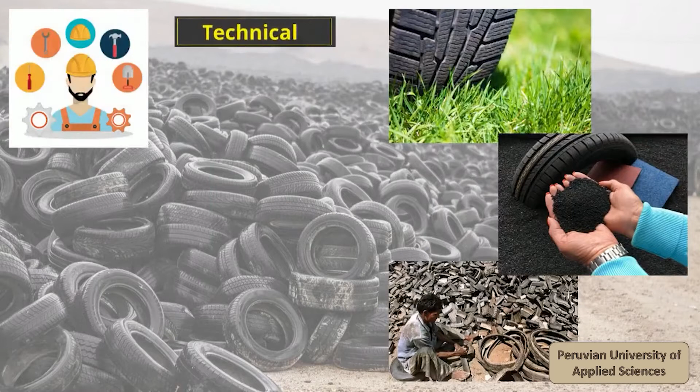At the world level, solid waste management becomes a serious problem. In this sense, the final disposal of end-of-life tires has come to represent a technical, economic, environmental, and public health problem for many countries. Peru is not exempt from this problem. With a fleet of almost 4.5 million vehicles, this leads to excess tire waste, and many of these tires end up in the Ate district, known for being one of the largest tire stockpiles in Lima, or simply lying in some corner of the capital.

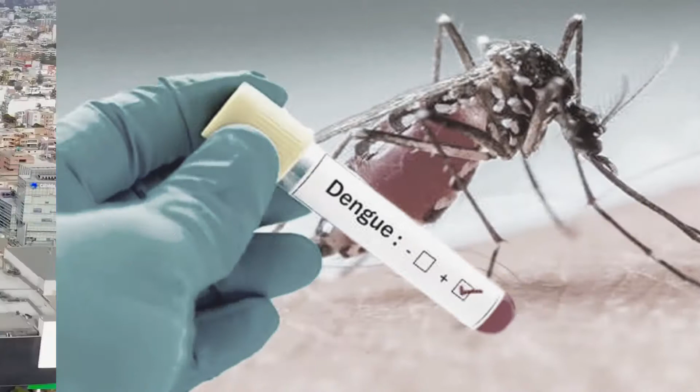It is known that in various areas it is customary to accumulate tires on the roofs or domes near the houses. Then, with the rains, artificial pools are formed inside, generating ideal places for the proliferation of the mosquito, which is the main vector of dengue in Peru. Also, Peru doesn't have a specific regulatory framework to deal with the problem of treating end-of-life tires.

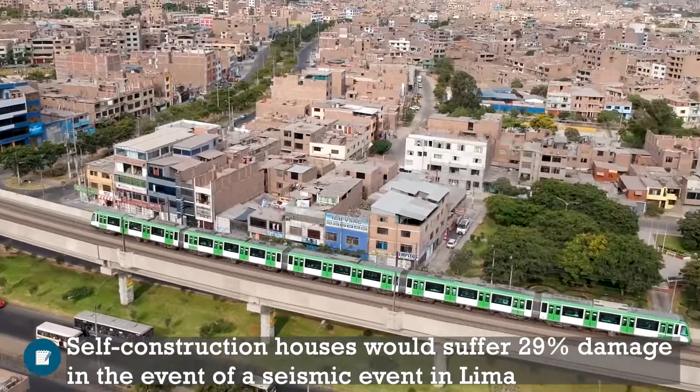In addition to this, in the current Peruvian reality, the less favored population located in Lima tends to build informally and without professional assistance, despite high seismic danger. These houses have stability problems, affect the quality of life, and have high seismic vulnerability. In the peripheral areas of Lima, 90% of the houses are self-built. Also, it is estimated that self-construction houses would suffer 29% damage in the event of a seismic event in Lima. So, what could be the solution?

Rubberized concrete is a new construction material. It is created by incorporating rubber particles from recycled tires into common concrete mixes. This addition impacts positively on the mechanical properties of concrete and also on the environment, because this concrete uses recycled materials. According to James Xue and Masanobu Shinozuka, rubberized concrete could be used as an earthquake-resistant structural concrete due to its energy dissipation properties.

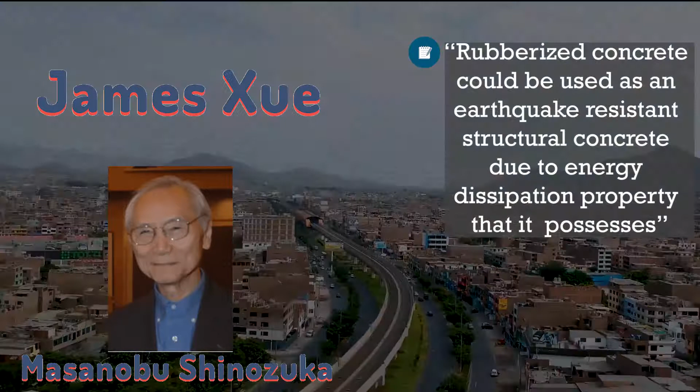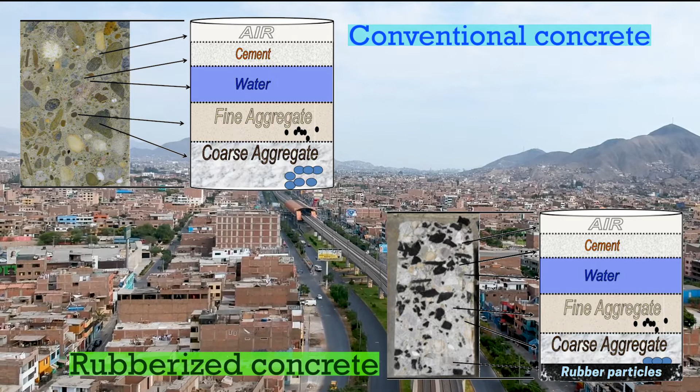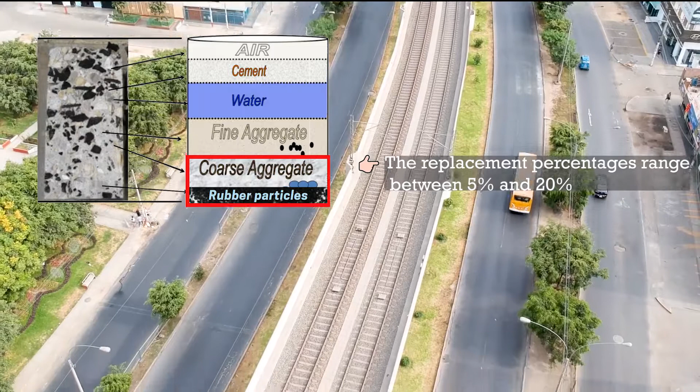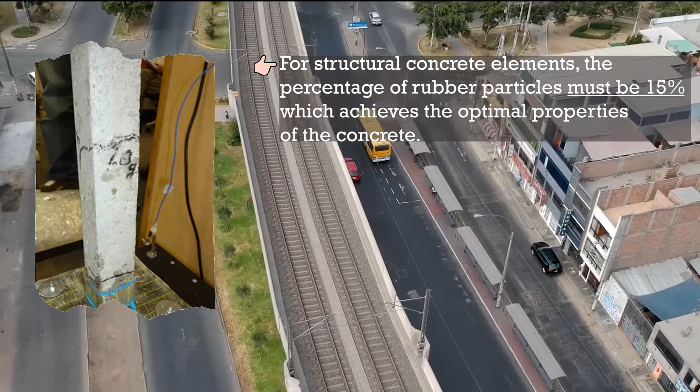The rubberized concrete components are similar to those used in conventional concrete, except for the rubber particle additions, which replace by volume a percentage of the coarse aggregate. The replacement percentages range between 5% and 20%. The final properties of the concrete depend directly on the percentage of substitution of the coarse aggregate by rubber. For structural concrete, the percentage of rubber particles must be 15%, which achieves the optimal properties of the concrete.

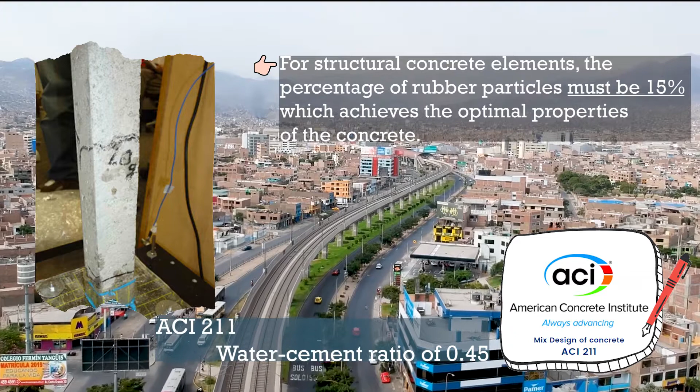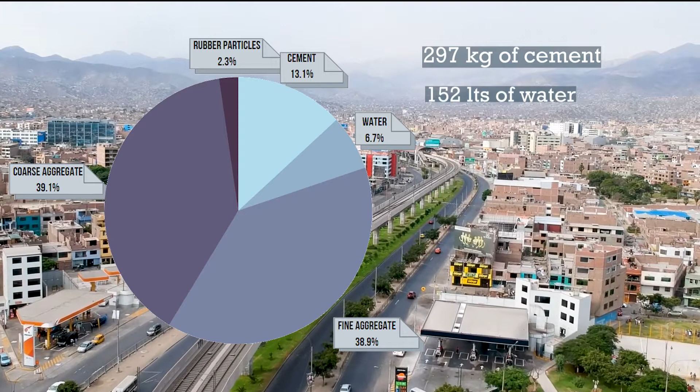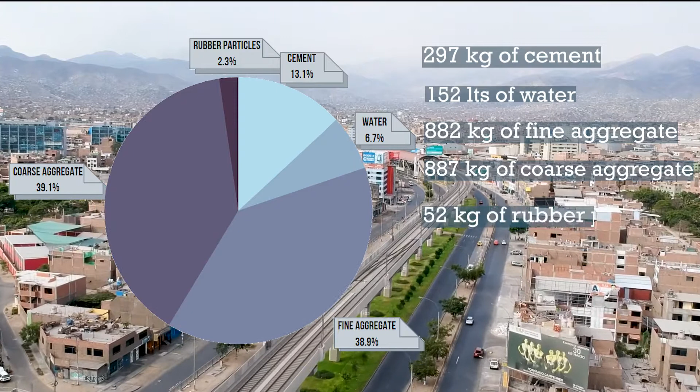Following the provisions of ACI 211 and considering a water-cement ratio of 0.45, the mix design would be as follows: 297 kilograms of cement, 152 liters of water, 882 kilograms of fine aggregate, 887 kilograms of coarse aggregate, and 52 kilograms of rubber particles. All these values correspond to a volume of 1 cubic meter of concrete.

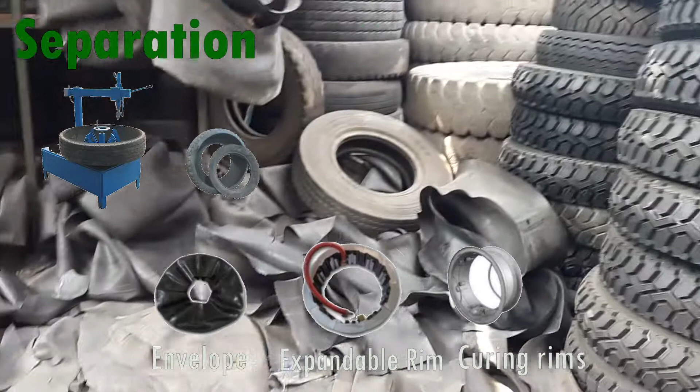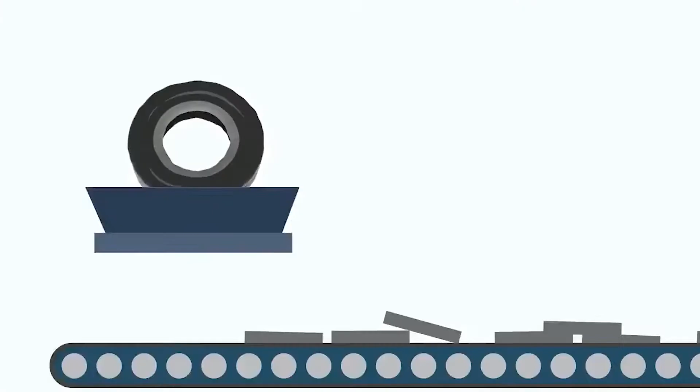The tire recycling process consists of separation: using specialized recycling machines, the rubber is effectively separated from other materials and dirt that used tires may have. Shredding: it can be done in different ways, mechanically or chemically. The mechanical tire shredding process is the most common and economical. It allows reducing the volume of the tires to the maximum without using chemicals or adding heat.

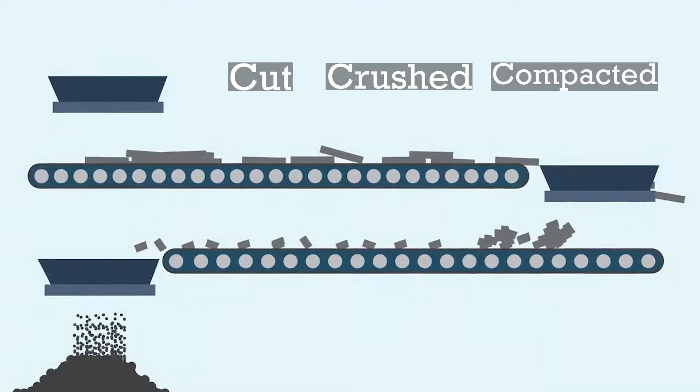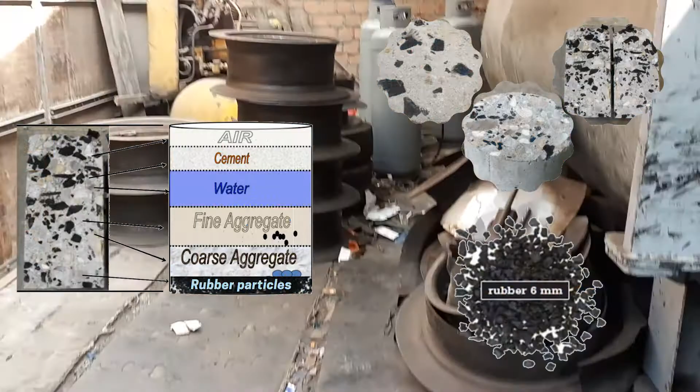The used tire is passed through a continuous line where it is cut, crushed, and compacted until the tires are reduced to a size so small that it looks like black rubber sand, in different ways depending on the use that is going to be given later. In the case of concrete, it is reduced to a size of 6 millimeters, replacing the coarse aggregate.

The use of rubber in concrete can be a good option to recycle it and regulate its uncontrolled use. For example, in countries like Spain, there are approximately 100,000 tons of rubber wasted without use. These are part of the 10% of microplastics in the world's seas that damage the ecosystem and marine life. These tires must have a use. Additionally, rubber gives concrete some interesting anti-seismic properties. Rubberized concrete reduces the average damping in the columns by 62% and reduces the seismic force.

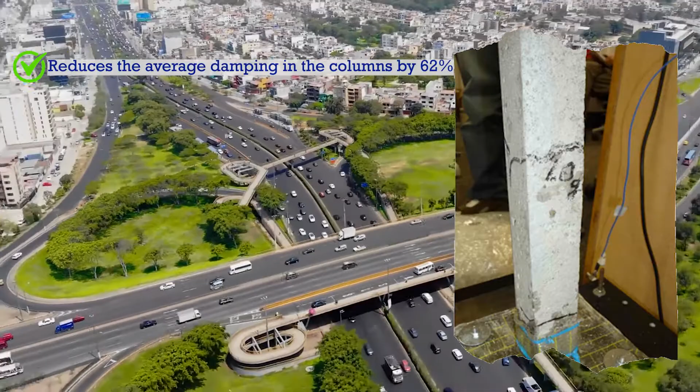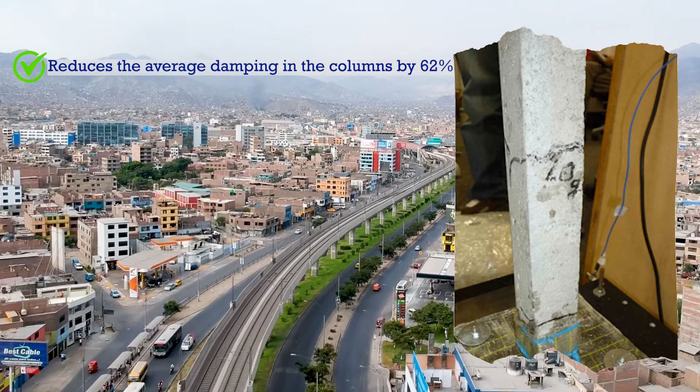However, it has low compressive strength, up to 40-70% less than conventional concrete. That is because the rubber absorbs plastic energy and the bond between rubber and cement is poor. Fortunately, there are additions like silica fume that improve this feature. Rubber also provides the concrete with properties such as acoustic insulation, greater durability, and greater hardness.

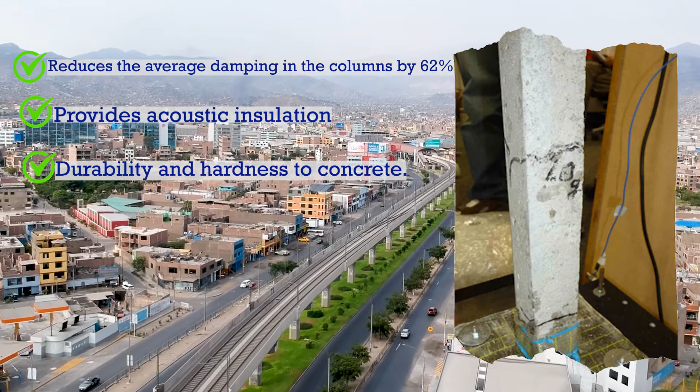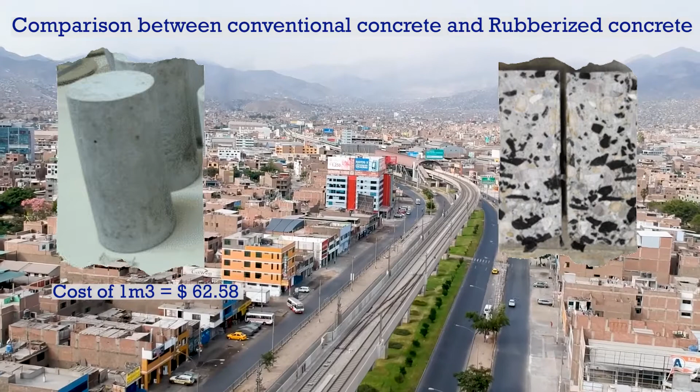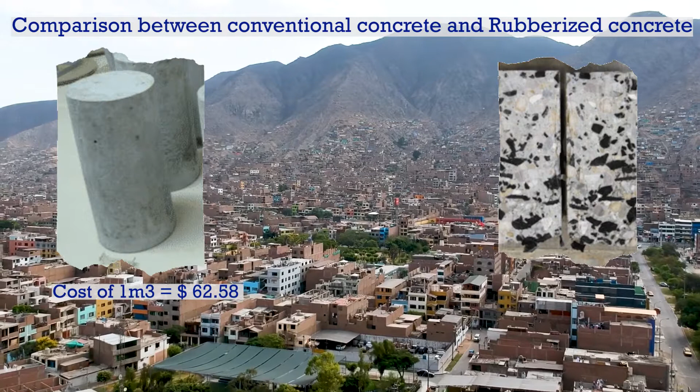Comparison between conventional concrete and rubberized concrete. The cost of a cubic meter of conventional concrete is $62.58. Its strength is from 170 to over 400 kilograms per square centimeter. However, rubberized concrete is 2.9% cheaper than conventional concrete. Its strength is from 170 to 250 kilograms per square centimeter. Also, rubberized concrete reduces the carbon footprint by 0.4%.

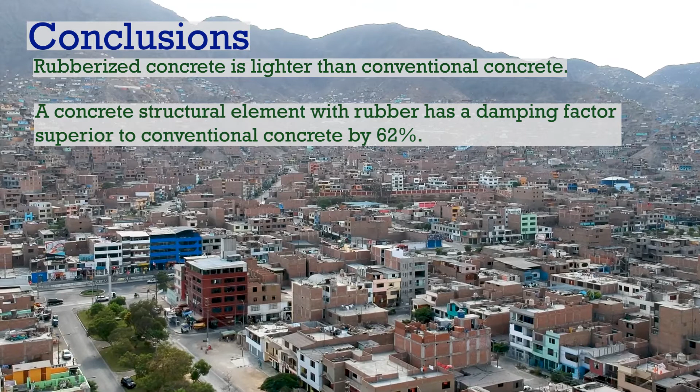Conclusions. First, rubberized concrete is lighter than conventional concrete. Second, a concrete structural element with rubber has a damping factor superior to conventional concrete by 62%. Third, on average, adding rubber crumb into concrete reduces seismic response acceleration by approximately 27%. Finally, rubberized concrete is 2.9% cheaper than conventional concrete. Furthermore, it reduces the carbon footprint by 0.4%.